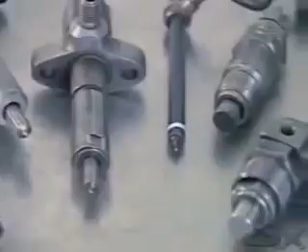Most diesel fuel injectors use the same basic design, made from heat-treated alloy steel. The actual shape will vary according to the application.

The injector assembly has several main parts. The nozzle assembly is made up of a needle and body. A pressure spring and spindle hold the needle on the seat in the nozzle body.

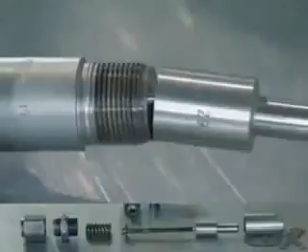A nozzle holder, sometimes called the injector body, may allow for mounting the injector on the engine and some method of adjusting the spring force applied to the needle valve. A cover keeps out dirt and water.

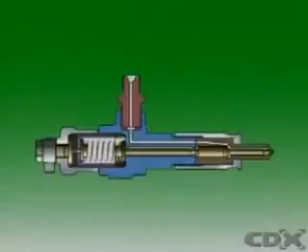The injection pump delivers fuel to the injector. The fuel passes through a drilling in the nozzle body to a chamber above where the needle valve seats in the nozzle assembly.

As fuel pressure in the injector gallery rises, it acts on the tapered shoulder of the needle valve, increasing the pressure until it overcomes the force from the spring and lifts the needle valve from its seat. The highly pressurized fuel enters the engine at a high velocity in an atomized spray.

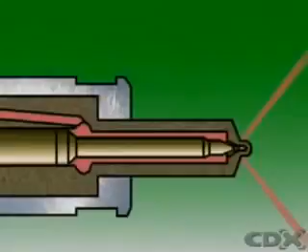As soon as delivery from the pump stops, pressure under the needle tapered shoulder drops, and the spring force pushes the needle down on the seat, cutting off the fuel supply to the engine.

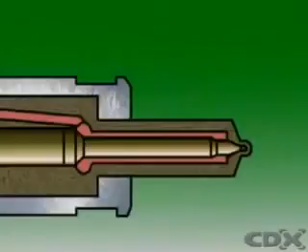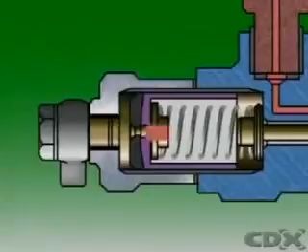Some of the fuel is allowed to leak between the nozzle needle and the body to cool and lubricate the injector. This fuel is collected by the leak-off line and returned to the fuel tank for later use.

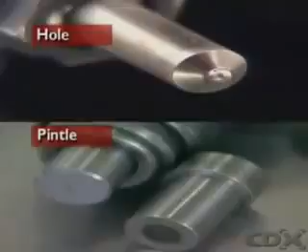There are two main types of injector nozzle, hole and pintle. Hole-type nozzles are commonly used in direct injection engines. They can be single-hole or multi-hole, and they operate at very high pressures, up to 200 atmospheres.

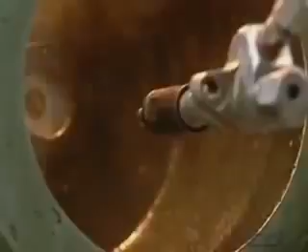They give a hard spray which is necessary to penetrate the highly compressed air. The fuel has a high velocity and good atomization, which is desirable in open combustion chamber engines.

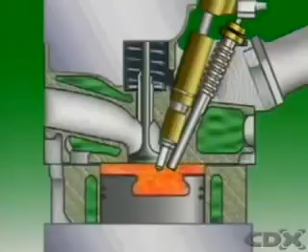In pintle-type nozzles, a pin, or pintle, protrudes through a spray hole. The shape of the pintle determines the shape of the spray and the atomization of the spray pattern.

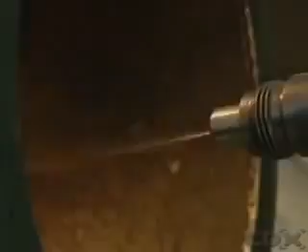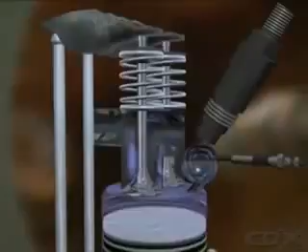Pintle nozzles open at lower pressures than hole-type nozzles. They're used in indirect injection engines, where the fuel has a comparatively short distance to travel and the air is not as compressed as in the main chamber.